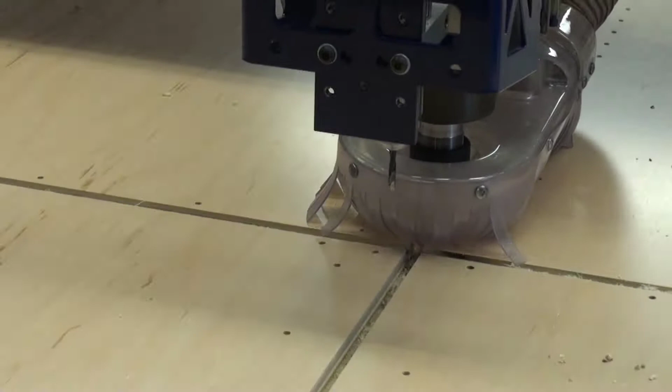Welcome to what's new in CabWriter 5. It's that time of year again when we release a new version of CabWriter. And as usual, we have some new functionality for you, as well as some functionality changes and some new parameters to provide you more flexibility in construction methods. We at CabWriter are very excited about this new release, and we think you will be too.

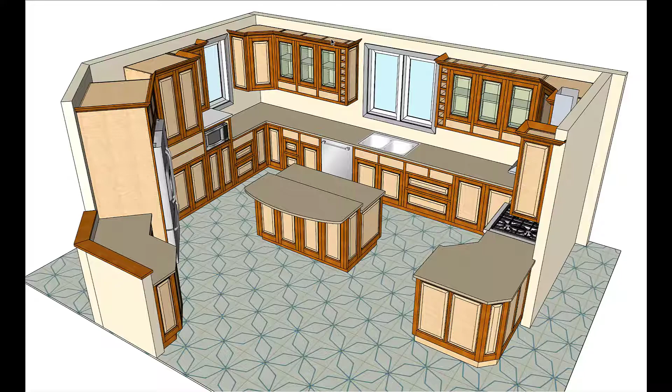So let's begin with CabWriter 5 new functionality. The first new piece of functionality we want to talk about is one-piece shaker style. This style applies to doors, drawer fronts, end panels, and back panels. It's meant to emulate the simple shaker style of CabWriter, but in a one-piece design that's millable on a CNC machine.

CabWriter will produce the DXF files required to cut these on a CNC machine. So let's take a look at our typical simple shaker style and let's convert it to one-piece shaker. The model you are looking at is our typical factory default settings shaker style cabinet. You notice that the face frame parts are 5-piece parts: 2 stiles, 2 rails, and a panel.

Now we're going to convert those to the one-piece shaker. Since we're going to mill this on a CNC machine, we're going to start out by setting up the CNC machine setup for the one-piece shaker. Down here in the left-hand corner, you see one-piece shaker style field depth. That's the depth of this field right here, and it's 9/32.

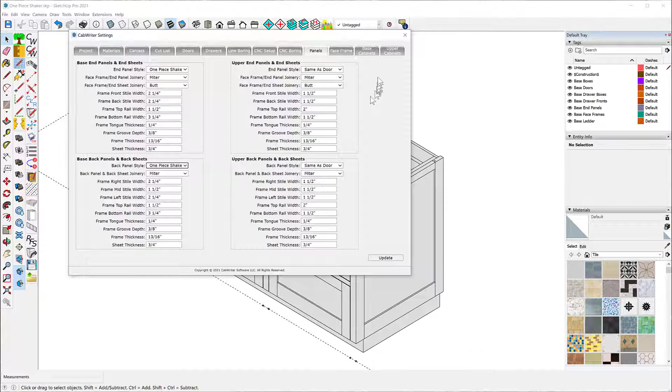So now I'm all set. I'll update that, close it. Now I'm going to redraw this cabinet, but I'm going to not use the stored defaults, rather the defaults I just set up. So now take a look at this cabinet. Notice this end panel is a single part, just one piece with a field milled out of the middle so that it looks like the basic shaker style end panel. The same with the doors and drawers - notice those are one-piece parts.

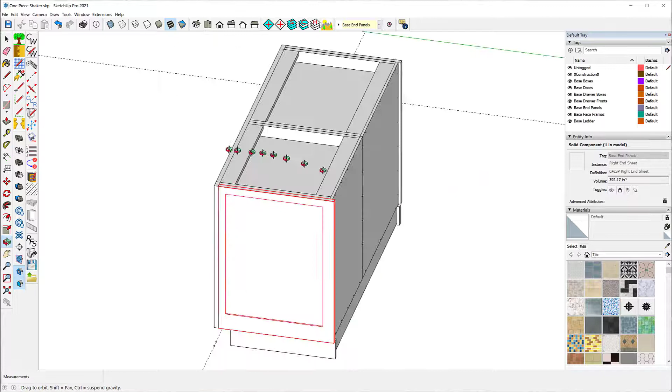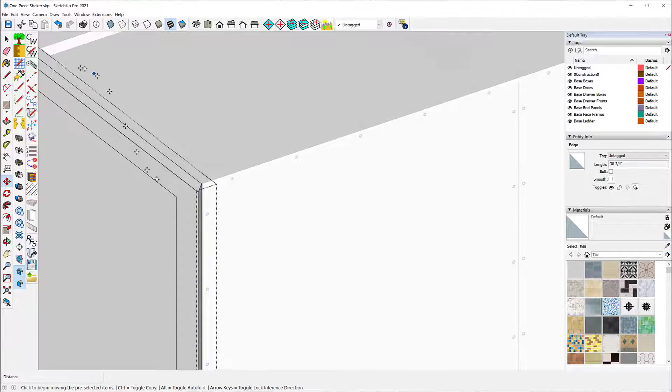Now I want to add a back panel to this. And to do that, I'm going to have to edit it a little bit, so I'll unlock it, edit, and I'm going to bring this in. Let me see, what do I have to do here? That's 1/2, I have to add 1/4 of an inch. So I'll bring this out 1/4, and I'm going to bring that part back in here like that. I'm not going to bother doing the other end. I have to actually, so let me do that real quick.

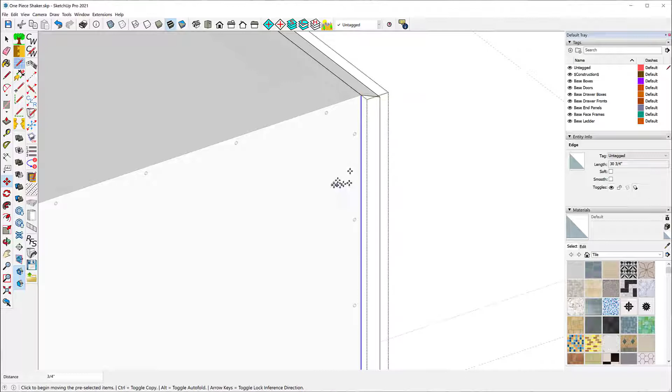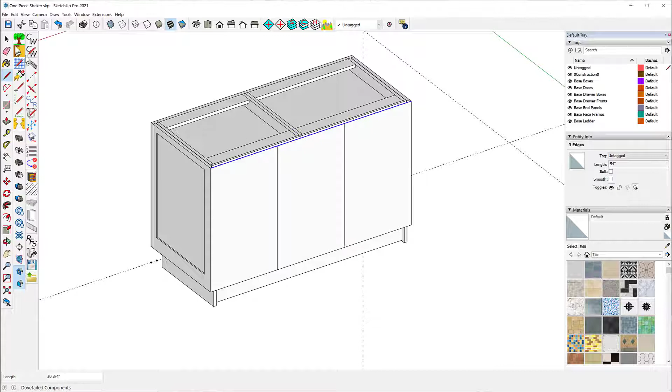Okay, now what I'm going to do is I'm going to put a back panel on here. I'm going to take note of the cabinet that I'm working on, and it's cabinet C4L. I'm going to select this upper line, and I'm going to divide it by 3, I'll just type 3 into the data field. And now I'll add the vertical lines, and I'm going to add a back panel, C4L.

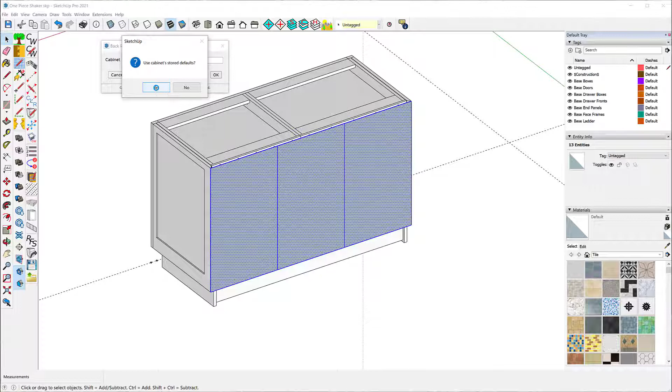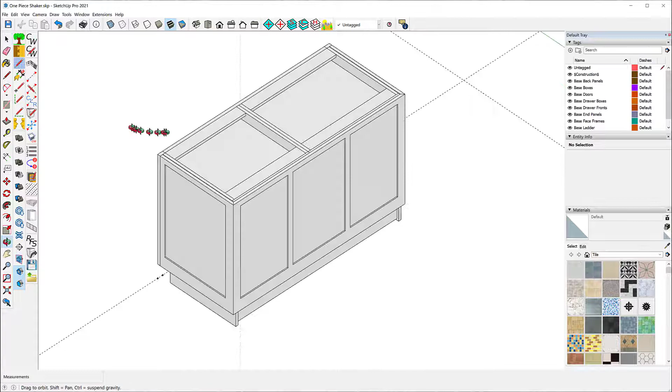I'm going to use the stored defaults. And yes, that's the cabinet I'm thinking of. And there you go. So now I have a back panel, also in the one-piece shaker style. So that's as simple as that. You can mill these parts on a CNC machine, and of course, they'd be made from some kind of a sheet good material, an engineered sheet good material.

So now let's go on to the next new piece of functionality. For a long time now, some of our users have been creating end panels and doors, tall end panels in doors, and inserting mid rails in them using native SketchUp tools. Well, in CabWriter 5, we decided to make life easy for them. In CabWriter 5, divided bases and divided uppers can now have mid rails in end panels and doors.

Now, we didn't include this functionality in standard base or upper cabinets because those are typically fairly short, 30 inches or so. And if you want a tall base cabinet or upper cabinet, you would probably use a divided cabinet anyway. You can emulate any of the base or upper cabinets with a divided cabinet. And so if you needed mid rails, that's naturally the cabinet to use anyway. So this is our solution for mid rails.

And what you're looking at is a variety of cabinets with mid rails in end panels and doors. Let's just take a look at some of them. Now, the refrigerator cabinet is an upper cabinet.

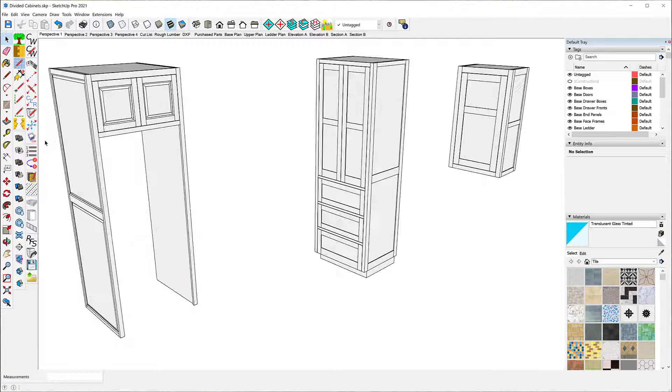It's an obvious case where you'd want a mid rail, because the end panels tend to be tall, mostly because they go to the floor in most cases. So let's just look at what you need to do to create that.

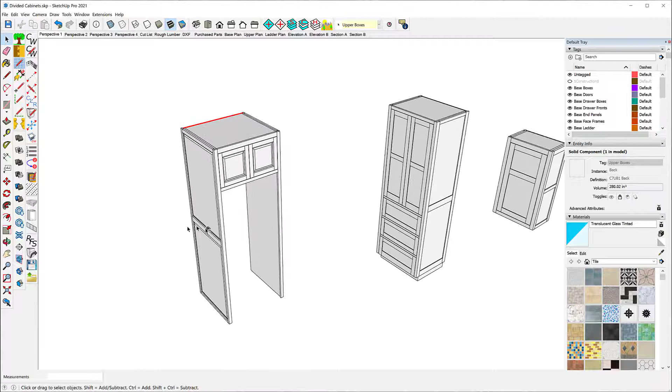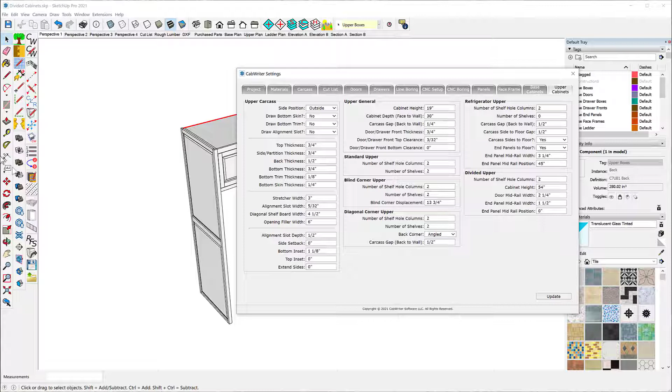Like I said, it's an upper cabinet. You'll notice for the refrigerator upper there are 2 new parameters: end panel mid rail width and end panel mid rail position. Notice the position is 45 inches, measured from the bottom of the panel to the midpoint of the mid rail. I'll show you that here.

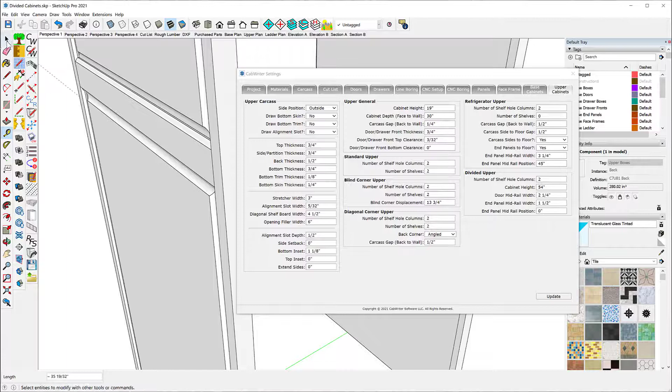We'll go from here to the middle of this, which is right there, and notice that's 45 inches. So that's how you specify the position of the mid rail. And the width of the mid rail, if I use this tool and click on it, you'll notice down here that the width is right at the bottom. The width is 3 1/4, just as it says here.

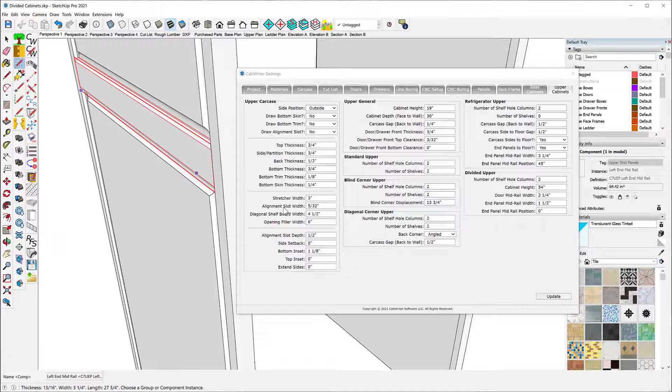Now if you don't want a mid rail, you would leave this at 0. Make that parameter 0, and that's an indication that there's no mid rail to be drawn. Notice when the mid rails are drawn, you get 2 panels, and you'll see that difference in all of your production documentation. I'll show you some of that in a bit. So that's the refrigerator cabinet.

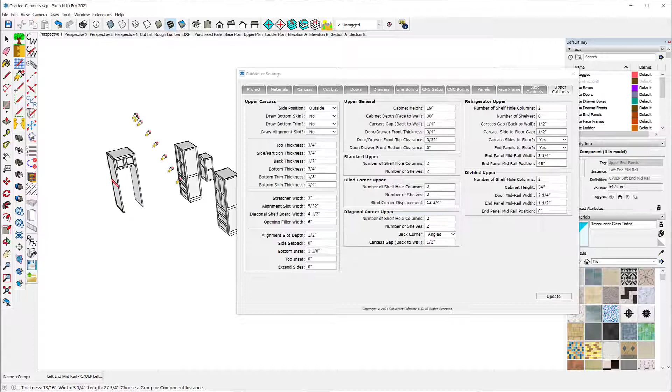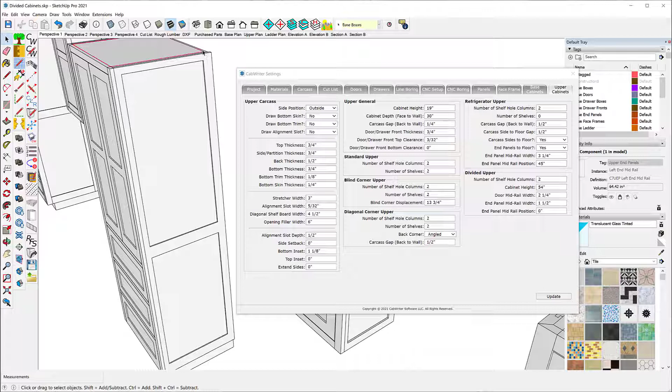Now we can do this with any style of cabinet. For instance, well, here's the basic style, and again, this is a divided base. So let me select the back here and look at the defaults for this cabinet, and let me look at the base.

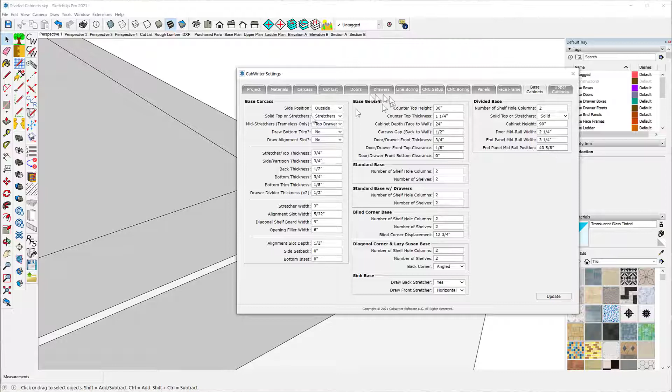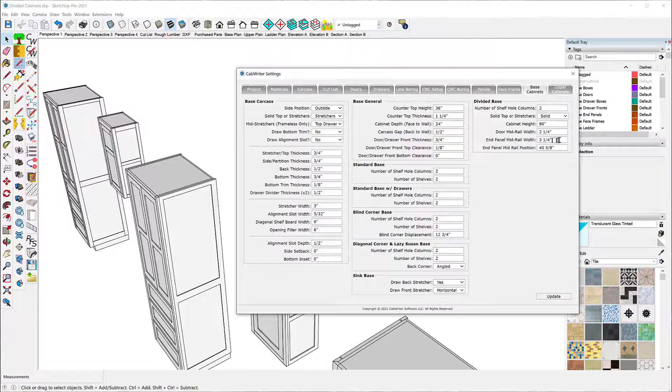Notice on the divided base you have a door mid-rail width, the same thing here, end panel mid-rail width, and an end panel mid-rail position. So the position of this mid-rail, regardless of the style, either this standard basic style or this one-piece shaker style, you can place a mid-rail anywhere you want. Again, this is measured from the bottom of the panel to the center of the mid-rail. For the doors, the mid-rail width is different than the width of the end panels, and you can see that here, they're narrower.

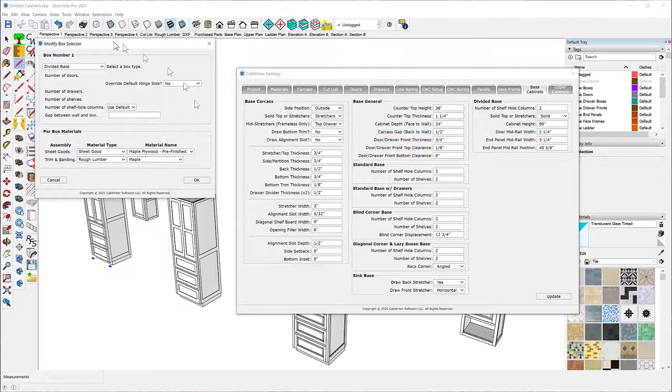Now, how do you specify the position of the mid-rail for the doors? Well, let's take a look at one of these. Remember, these are divided cabinets, so I'm going to edit this cabinet and use the stored defaults. This is the normal modify box selector you get, or box selector. It's saying it's a divided base, and I'll bring over the divided base dialog box. Notice there's another column here called mid-rail.

Further, you'll notice that in the option column there's an additional option. It used to be just door, drawer, or none. Now it's none, door, divided door. So if you want a mid-rail in a door, you choose divided door. You can choose one or two divided doors, and then you can specify the position of the mid-rail, again based on the distance from the bottom of the door to the center of the mid-rail. So this is a change in the divided cabinets, this new column, and this additional selection here.

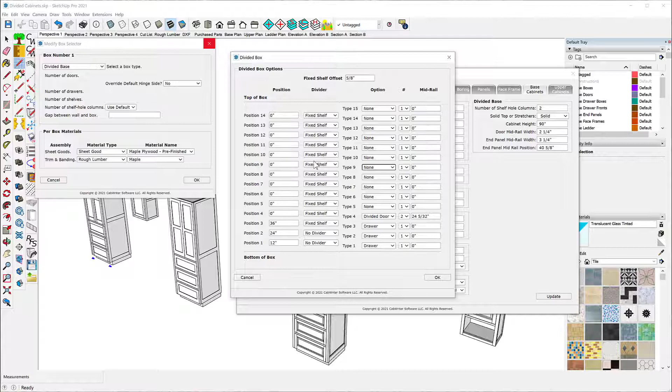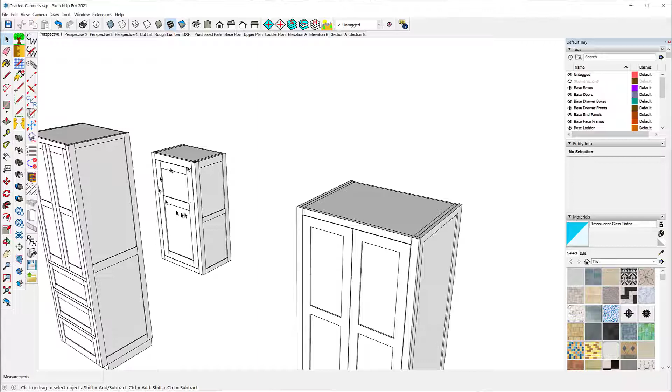So it's as simple as that, no more to it. Well, I'll cancel out of here. And again, notice that you can use this in the simple style of shaker, in the one-piece shaker, or with the raised panel styles of doors, drawers, and end panels.

Okay, so now let's move on to our next new functionality. One of the most exciting new features in our CabWriter 5 release is automatic texturing. Most users are aware of how important texturing is to create something that looks like a photorealistic image of their models to show their clients. Well, now CabWriter textures cabinets as they are drawn, or you can texture a whole model at once, or just a selection of parts.

CabWriter comes with 11 factory installed high quality grain textures. But we also have on our website approximately 250 other grain textures that you can download and install in CabWriter. Textures are a parameter, just like any other parameter in CabWriter, so you can change them while you're editing, set them up when you first draw a cabinet, or just choose a set and repaint the entire model.

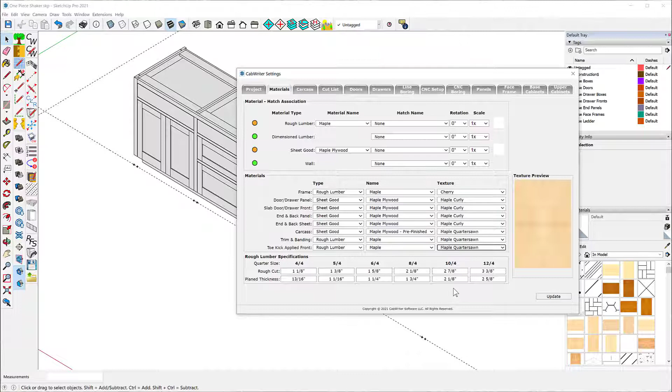Carcass, we'll use maple quarter sawn. Trim and banding, we'll use maple quarter sawn. And toe kick applied front, we'll use maple quarter sawn. And I'll update that.

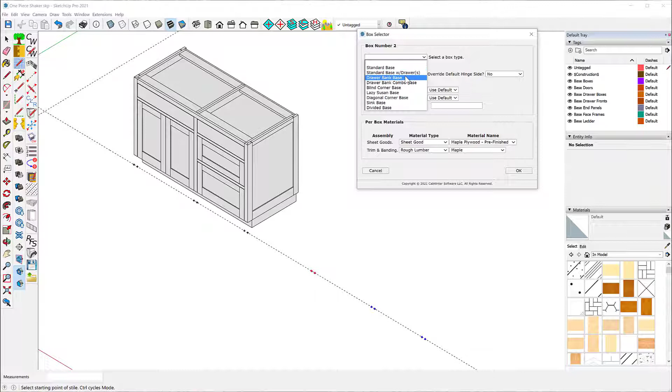So I've got this laid out for the same cabinet as here. Let's see what happens. Okay, the first cabinet is going to be a standard base with drawers, 2 doors, this is going to be a drawer bank base. Just say OK. And there you go, totally textured.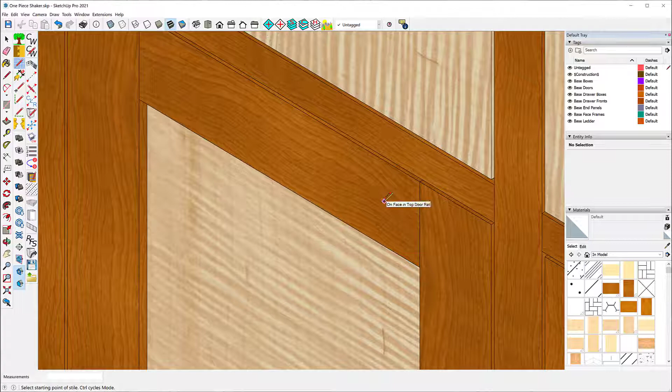And if you look closely at the quality of these textures, you'll see they're quite high. The other thing you want to notice is that it gets the grain direction correct. Notice for the rails, the grain direction is this way. For the stiles, it's this way. That's also true on the inside of the cabinet. It will get the grain direction correct based on our automatic grain direction capability in CabWriter.

So how does this happen? Well, like I just showed you, you go to the Materials section, and you want to do this probably right at the beginning of your model. Just set up the textures.

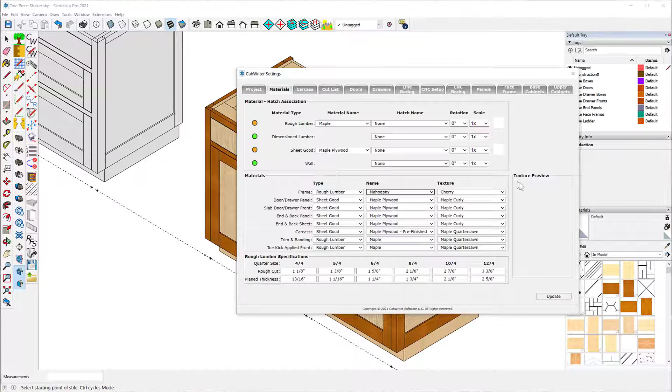Now suppose I want to change it. I can simply say, let's see. Let me make this mahogany. Actually, let's make it walnut. That's a panel. I'll leave that curly maple, and everything else. So I'll just change the hardwood.

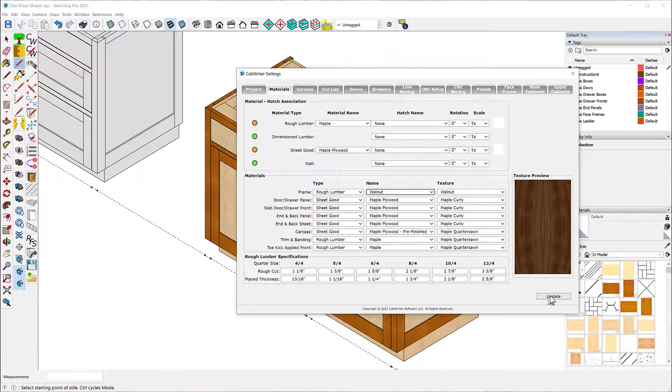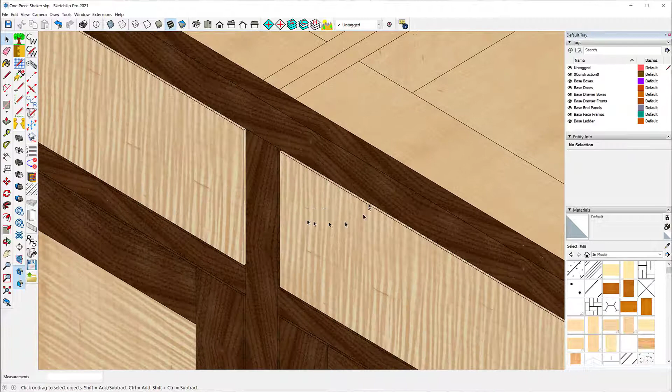And I can update this. I can redraw that selected cabinet. And no, I don't want to use the stored defaults. I want to use the new one I just set up. And there you go. So now we have a different grain, color, and pattern. So anything that redraws the cabinets or edits the cabinets, you could change the textures at the same time.

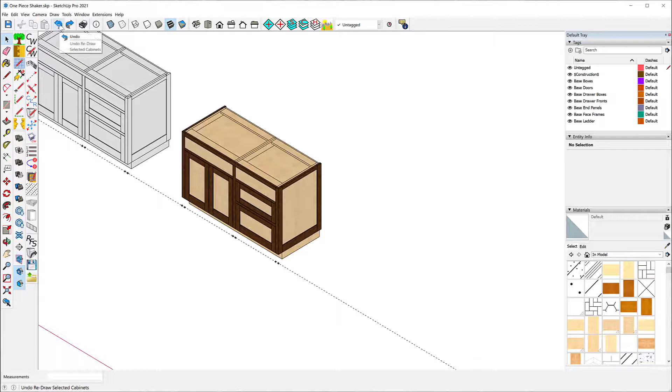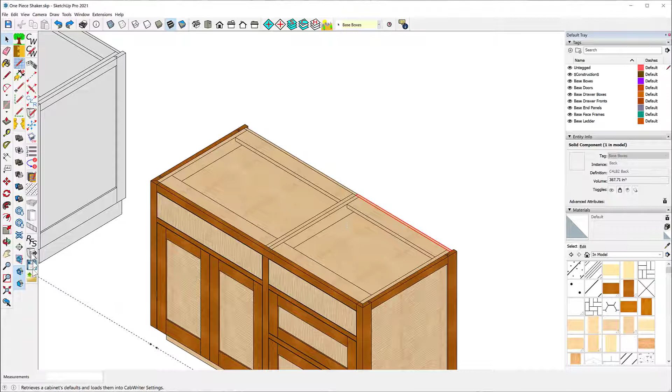Let me go back to this more pleasing looking color. There we go. All right, now let me bring out these defaults and just check them to make sure. Okay, they're what I want. So now I can redraw this cabinet. Say no. And there you go. Now, I'm going to back that up.

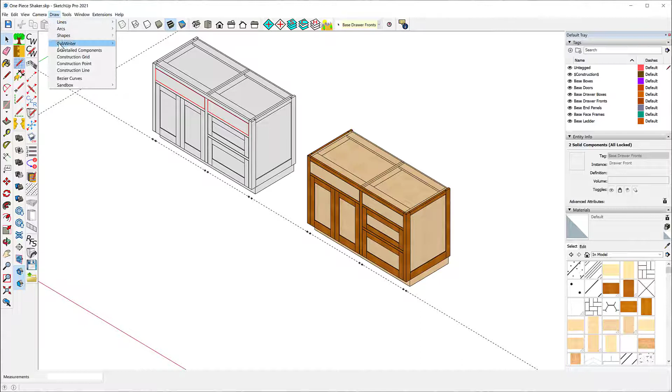And suppose I just want to texture one or two pieces. I can select them, go to Draw, CabWriter, Texture Selection. And notice it knows that these are the hardwood drawer fronts, and it uses the correct texture for that based on the way I had the parameter set up.

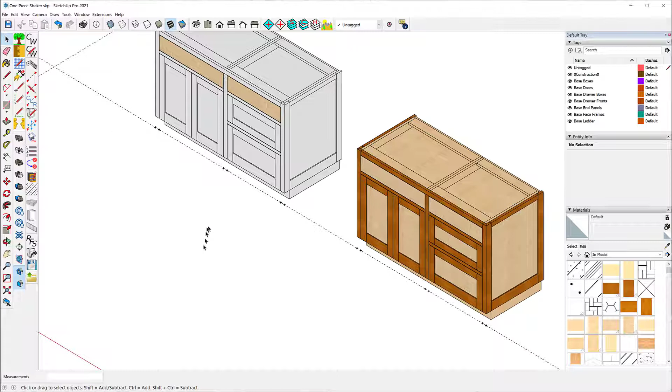Now if I want to, I can texture the whole model all at once, and that's what I'm going to do right now. Go to Draw, CabWriter, Texture Model. And there you go. The whole model was redrawn. Well, actually, the model was not redrawn. Just the textures were changed in the model. So that's basically texturing.

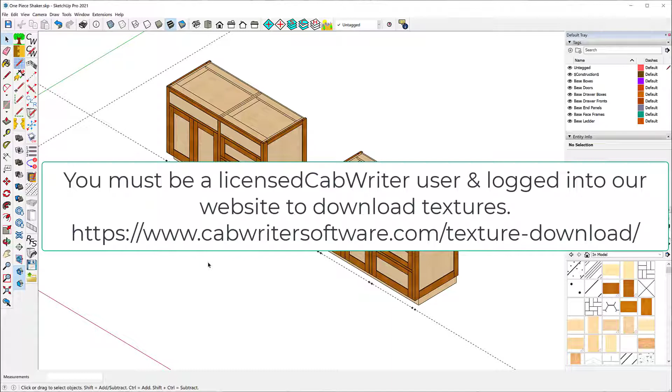And like I said, you can go to our website and you will find a place where you can download up to 250 different grain patterns. And in the manual, there's a whole chapter in the user's guide on texturing. It tells you how to create your own textures if you want to and install them, or go to our online site, download them, and install them. So this is one of the more exciting features of our new CabWriter 5 release.

Okay, so let's move on to our next new functionality. In CabWriter 5, we expanded the Create Basic Scene Set command to automatically include all necessary elevation and section views. Elevation and section views take a long time to create. So we discovered an algorithm for analyzing the model and figuring out which views were required, the minimum set required for a complete shop drawing set.

Now, even though we create all of these automatically, you can still add to the set anything you want, and you can delete any of those that are created automatically, and or you can edit and modify any of the scenes that are created automatically by CabWriter. But we've reduced the amount of work you have to do substantially with the creation of elevation and section views.

So let's see how this works. Notice in this model that I have no scenes at the moment, none at all. In fact, you can see that down here under the Scenes tab, there's no scenes at all right at the moment. So I'm going to create all of the scenes that I need. And to do that, I'm going to use the CabWriter Create Basic Scene Set.

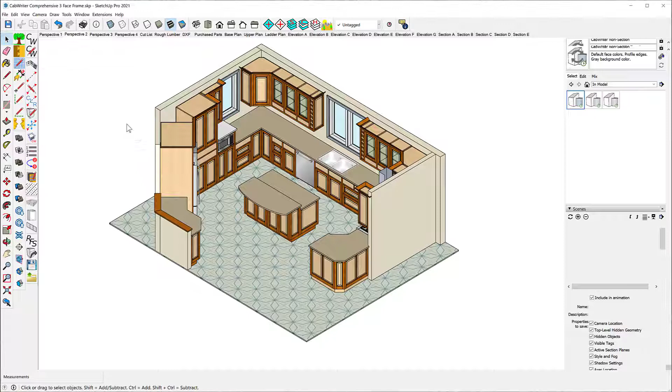Okay, it's completed. I counted these once, and I think there's about 23, 4, or 5 scenes that have been created, I forget which. But that's quite a few scenes. If you had to do those manually, that would take you quite a while. Let's just look at them.

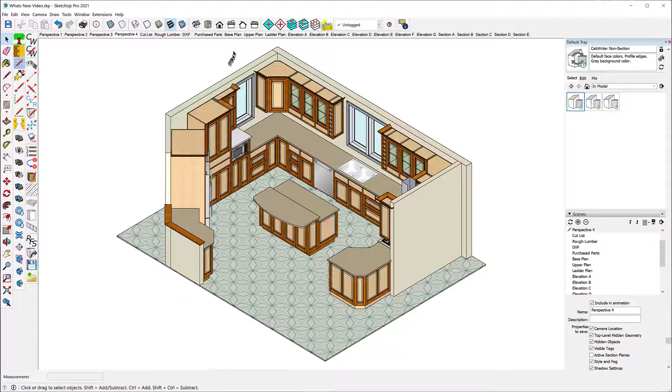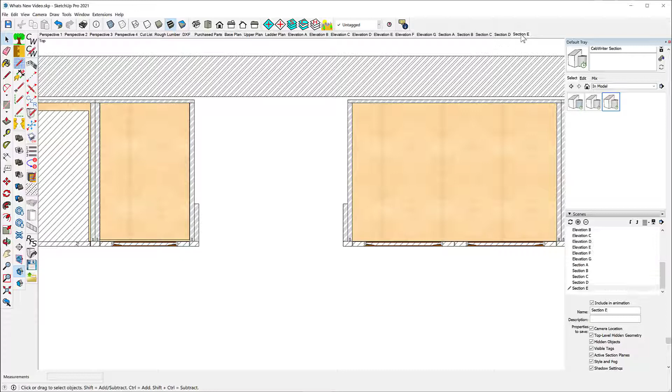For instance, the base plan. Notice right off the bat that in addition to the hatching, we have the textures included in the base plan. And I think that's true for all of the sections and what have you.

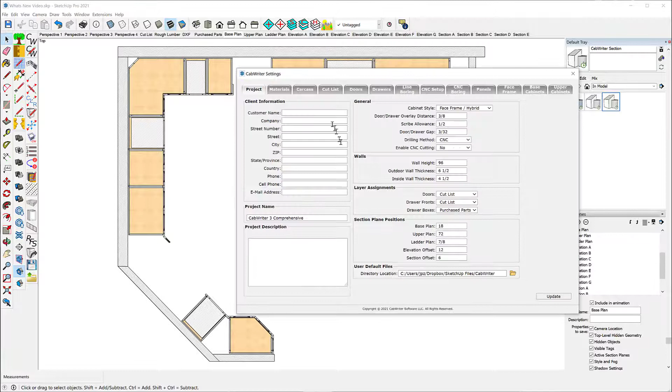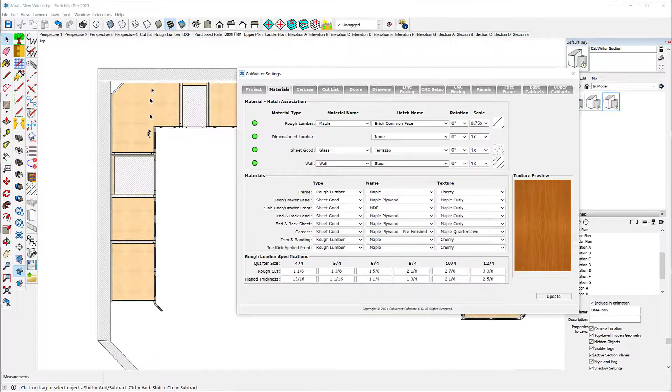Now you have to make a choice here. If you make shop drawings out of drawings like this, you're going to use a lot of colored ink on your plotter. So what you might want to do is, before you do shop drawings, go back to the default on all of the inputs, the default for texture on all of the inputs. Then when you create these shop drawings, they will look normal. They'll just be white here, and the only thing you'll see is the hatching. Everything else will be white or gray. The reason for this is hatches and textures are in fact materials. Both of them are materials, and that's what these parts are painted with. So you can't have one without the other unless you don't texture using the texture tool.

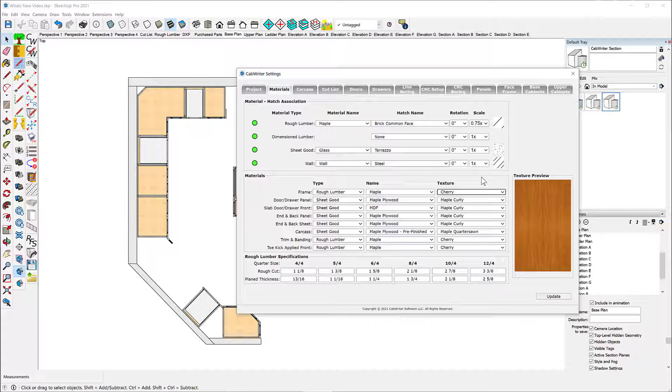But because you have this tool called Texture Model, you can simply switch all of these back to default, texture the model with that, and then come back and retexture the model with these settings. So it's a little bit of a nuisance, but it's a function of SketchUp. We in CabWriter don't have any control over that. So that's just something you have to look out for.

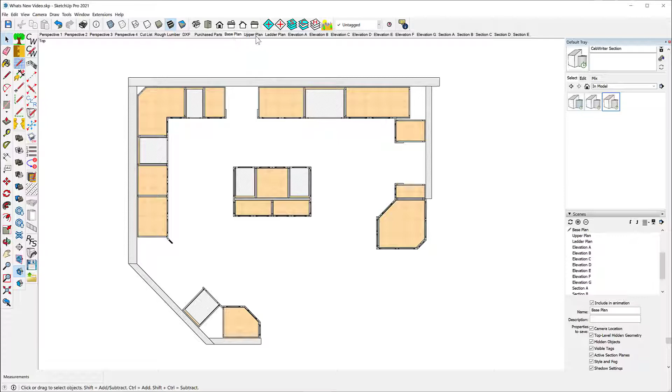But that aside, we now have our usual 4 perspective scenes: our cut list scene, the rough lumber scene, which is kind of new, but I'll explain that in a moment, the DXF scene, purchased parts scene, base plan, upper plan, and ladder plan. But now we've got A through G sections and elevation views.

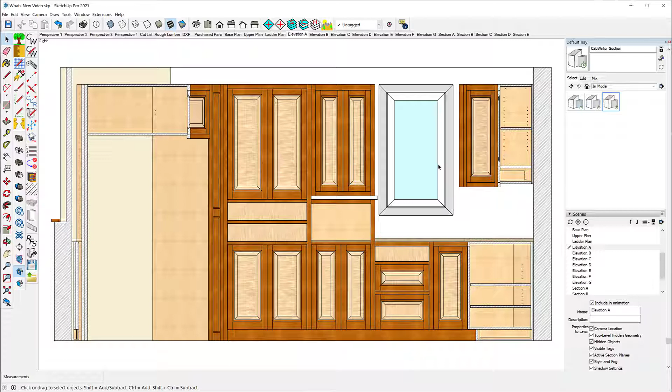Let's just look at them. This is your primary elevation, probably looking at the north wall or the wall with the... No, that's not the sink wall, that's the west wall. There's the sink wall. And why do we have 2 elevations of the sink wall?

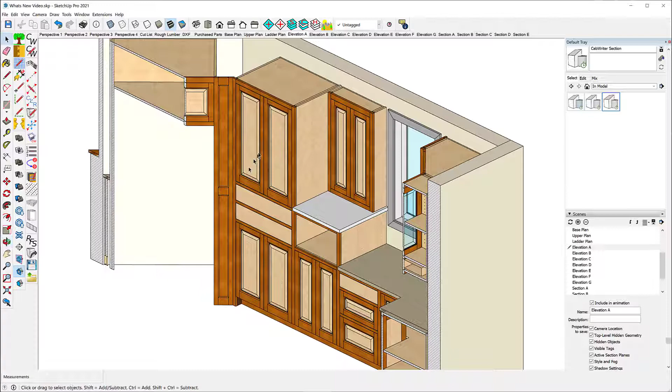Oh, one is looking at this cabinet. And one is looking at this cabinet. Okay. So this one includes the island. And in this view, we'll get to this in a moment.

In this view, what you may want to do is eliminate all of this stuff, and I'll show you how to do that, I think in part 2. So in this view, you just may want to eliminate everything but the island here. So when you look at this view, you'll get just the island. And you can, of course, blow that up.

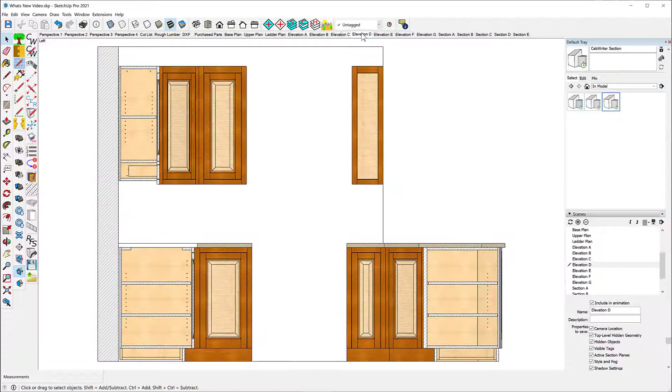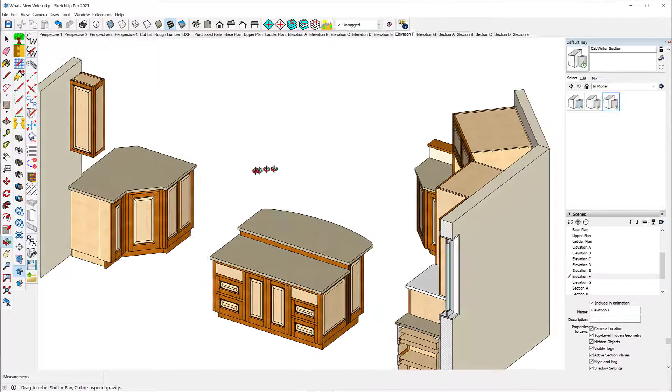This view is of the east wall. That's southeast. Oh, that's the other side of the island. That's the inside side of the island. The window is over here. And that's of the refrigerator.

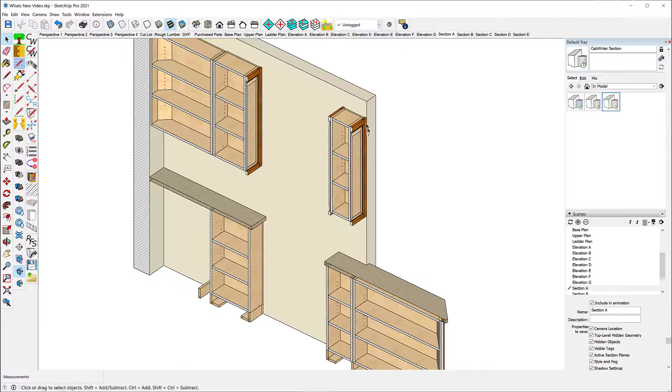And again, you can go through these and you're going to have to modify them a little bit. I'll show you in a second what I mean. This is the window.

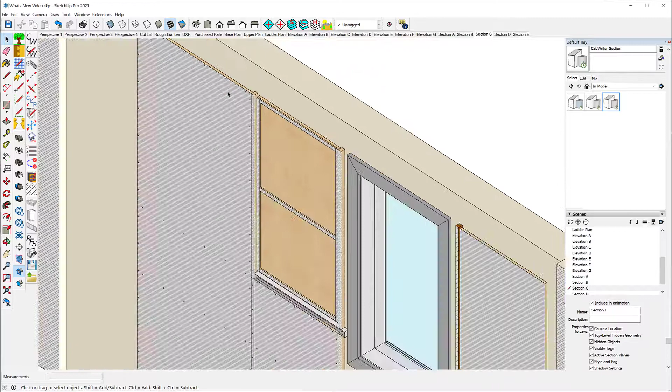Okay, now let me explain this one a little bit. Let me let this do a file save here. What you have here is some backs of the cabinets that have been cut into. So let's look at the sections here.

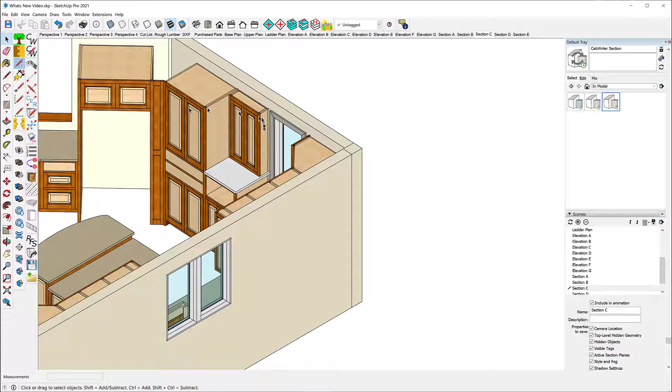If I get rid of the sections altogether, notice that this cabinet is very shallow. It's, I don't know, like 6 inches or something. So when it does its analysis of this, it knows it needs a section view of this. So what it does is it takes the face of this and goes back some number of inches. Well, the number of inches it's going to go back is shown down here.

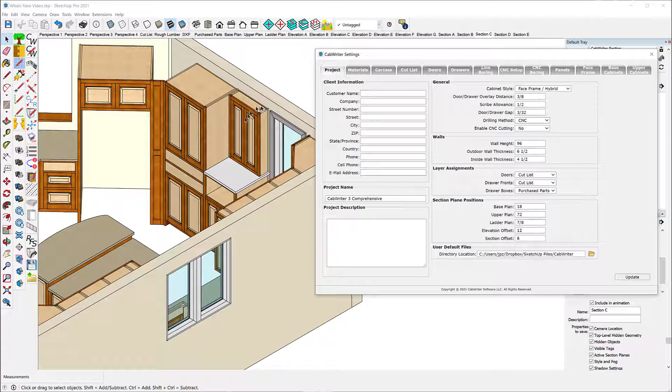Notice that the elevation offset is 12 inches, the section offset is 6 inches. So the analysis looks at this and comes in 6 inches from this face. But the cabinet itself is only about 6 inches deep. So what happens is you get a section cut that is right on the face of these back panels right here. Notice this section cut right there.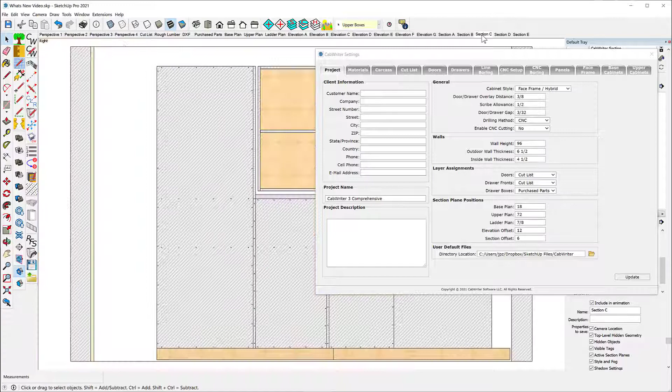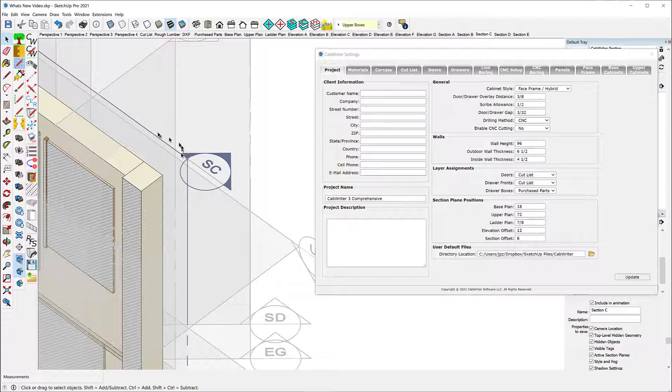So the way you can fix this is bring in the section cuts again. In fact, let me just select C again. Now let's look at our section cuts. And notice this was section C. We'll see this SC. That's telling you this is the section plane that's controlling that.

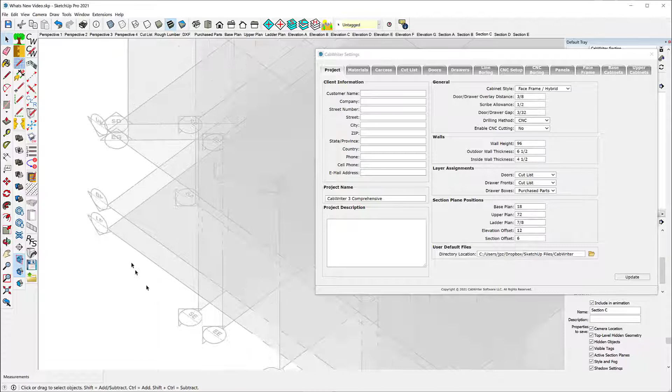And I might as well explain that right now. One of the things we've done in CabWriter 5 is we've labeled all of the section planes that are used. For instance, BP stands for base plan. UP stands for upper plan. LP stands for ladder plan. And then all of the sections start with S. So this is SE, that's section E. This is elevation E. And like I said back here, the one we want to work on is section C.

So what we're going to do is we're just going to move this out here.

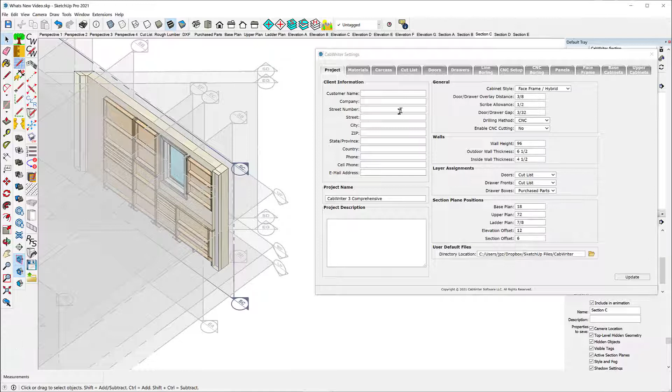Let's go back to section E now, or section C. And now you notice you don't have that cutting of the back panels.

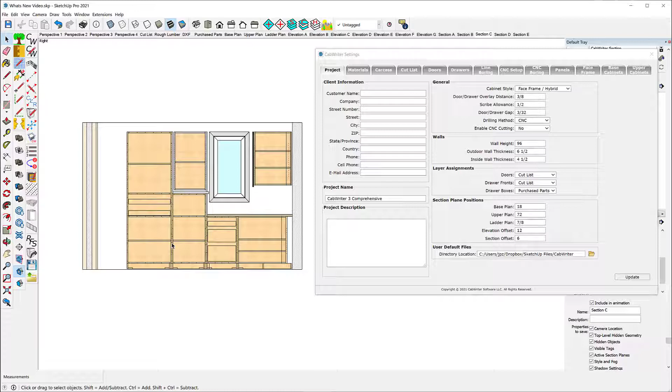So you will have to do a little fixing up of these sections and elevation plans, but the amount of work you have to do is rather small. Section D, that's the refrigerator, taking a section of the refrigerator. And section E.

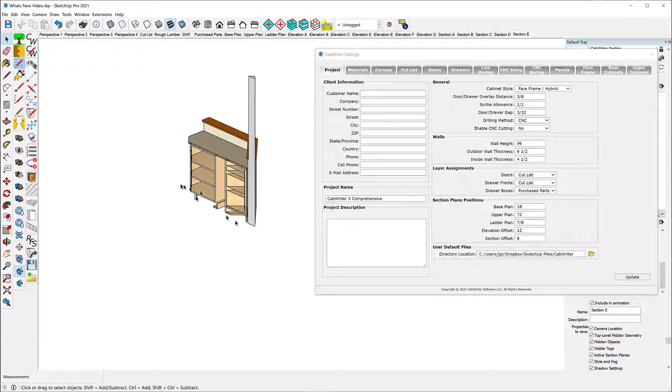That's taking a section of the little half wall, the cabinets on the half wall. All right, so there you go. You've got all the elevation and section views.

And so now let's move on to our next new piece of functionality. In CabWriter 5, we've added a new report to the CabWriter production documentation tool. Once you've created your reports and you open the folder that they're stored in, you'll notice a new schedule called Box Schedule.

Now, Box Schedule is used for project costing. An awful lot of our clients, cabinet makers, determine their project cost based on the number of boxes in a model, the width of those boxes, height, depth, number of doors, number of drawers, numbers of shelves. So for each type of cabinet and for each size of cabinet and for the number of doors, drawers, and shelves, they have a budgetary costing that they can use to develop the project cost, the total project cost.

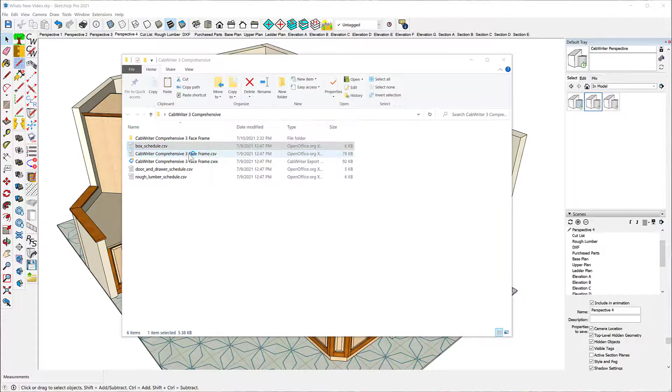So this schedule is meant for project costing. Do not use it to get information for fabrication. It's just project costing, so treat it that way. So if we open it, we get something that looks like this.

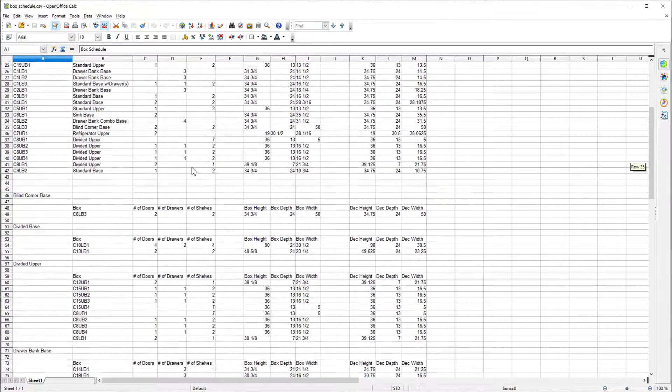Now that's sorted by box number. The other way we've sorted it, and this can be used as a good check to make sure that everything's included here, so you can quickly go through your model and make sure that all the boxes have been included. But we've also given you a different breakout, and this time we break it out by box type.

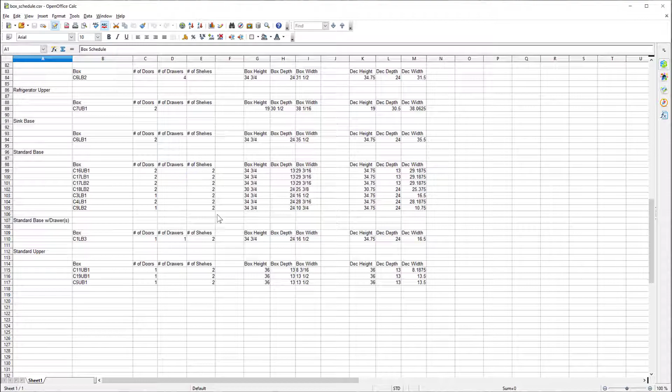So blind corner base, there's only one of them here, but it's got the same information. Divided bases, there's 2 divided base cabinets. Divided upper, well, there's 2 divided upper cabinets, but quite a few boxes. And drawer bank base, so on and so forth down the line. So again, this report should be useful for project costing.

Well, that's it for part 1. In part 2, what we're going to do is there's a number of new pieces of functionality, things that have been changed. For instance, the Stiles and Rails report is now a rough lumber report, and we'll tell you about that.

The sheet optimization settings dialog box has changed substantially and is more helpful, we'll describe that. The sheet good layouts and CNC layouts for sheet goods, we've added some functionality to that so you can move parts around, and that's useful for things like grain matching of parts.

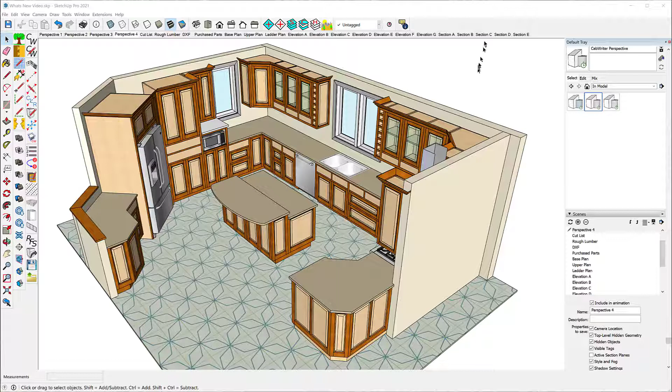We'll talk about that. We're going to show you how to eliminate cabinets or parts or numbers of cabinets in a scene, like we needed to do for section C. Oh, not section C, but I guess it was elevation B. What we wanted to do here was get rid of everything but the island, and we'll show you how to do that with some new functionality, or modified functionality, in part 2.

Construction holes have always been through holes up till now, but now you can define construction holes as partial holes, that is, they have a depth that's not through the sides. And that's useful if you want to use things like dowels and stuff like that.

We have some support for CAM software where you can actually include the 3D depth of things, whether they're holes or any shape in your geometry. You can give it depth, and the depth will appear in the DXF file because some CAM software packages actually use that information. Others get confused if it's there, so it's selectable.

And lastly, we'll talk about the ladder base. Up till now, the ladder base thickness and the carcass thickness were the same, typically 3/4 of an inch. Now you can specify a different thickness for the ladder base, and we'll show you that.